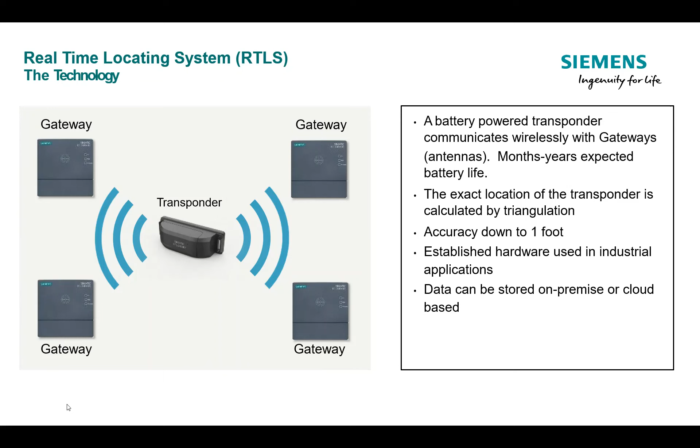The data that is gathered at the gateways is sent up to a head-end server, and these are the other components involved. So you have that infrastructure layer with gateways and transponders mounted on the assets, whether they're forklifts or crates or bins or any kind of vessel, and then pinging the gateways.

The XYZ coordinate TCP/IP information is provided to the locating manager. That's the head-end server. Locating Manager is the base level of software we can provide in that head-end server. We also have a higher software option called Location Intelligence. We'll differentiate between those in the next few slides, but that's where the smarts of the system are, and everything comes back to the Locating Manager.

The next step up is IT integration. What sort of systems do you have existing in your facility and use on a day-to-day basis that we'll have to interface with? That can sometimes take IT integration work, either via your own IT folks or solution partners that Siemens can recommend. But all that information is then sent up to your higher level system and translated into the information you might need for daily reports, etc.

The gateways are PoE devices, so typically powered by PoE. If you cannot power one by PoE, we can use an AC adapter, and the gateway in that sense, not connected directly to Ethernet, can speak to the other gateways wirelessly in a mesh topology. So you can have a mix and match of some that are PoE powered, some that are wirelessly connected to the other gateways. The fastest, best in terms of latency, since we're talking about RF here, would be to have them PoE connected for the lowest latency between gateway communication.

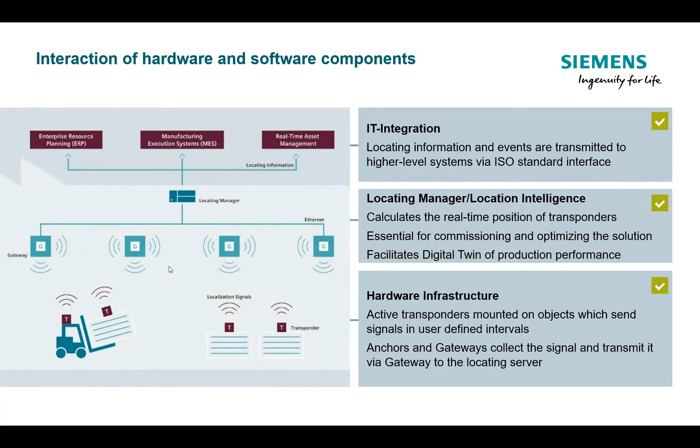Number one is the resolution needed. You might need 1 foot, you might need 3 feet, you might need 10 feet. The lesser the resolution, the fewer gateways, obviously. It also depends on the technology used. The FCC does govern which frequency bands to use, both indoors and outdoors. I'll say they restrict which frequency bands you can use.

In an indoor scenario, you use a combination of frequencies in the 3.5 gigahertz band, 2.4 gigahertz, and 6 gigahertz to do that triangulation and get the higher resolution. Outdoors, the FCC says you can only use 2.4 gigahertz, and using 2.4 gigahertz only, you're not able to achieve that 1 foot resolution — the best you can do is about 3 feet or so. The gateways themselves have all the frequency options in them; there's not a different one to use outdoors versus indoors. It's simply a matter of configuring for ultra-wideband use for indoor application, versus outdoor use at 2.4 gigahertz.

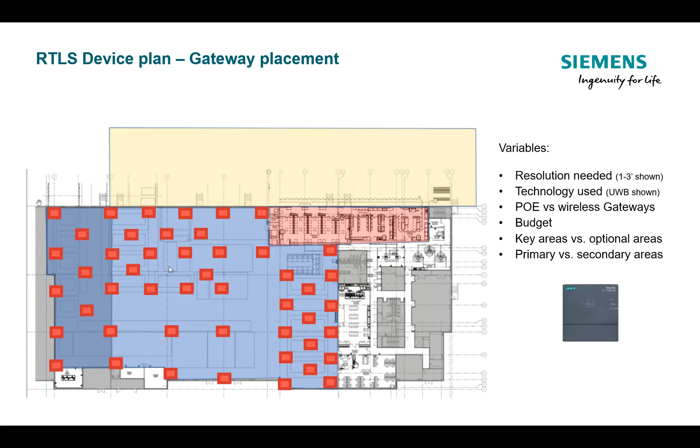Again, this was a fairly dense deployment because we're tracking to a higher resolution, and we also have issues at this facility from time to time as these equipment shelters are being constructed. There are times when this whole factory floor can have a dozen or so of these buildings, and what are they made out of? Metal and so forth, and have a high degree of reflectivity for RF, as well as potentially blocking line of sight.

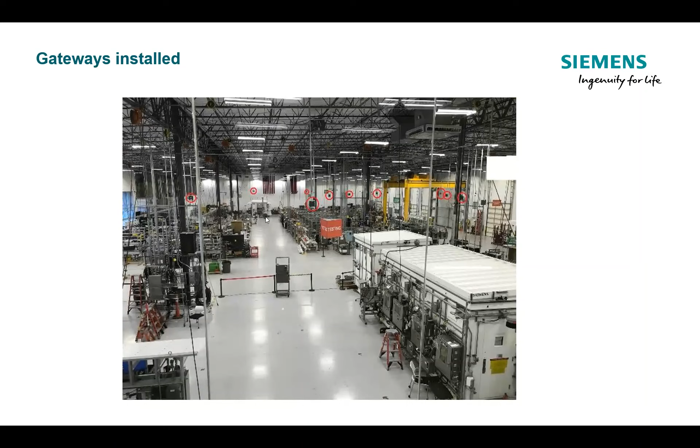Ideally, when we locate these gateways, we are planning for doing what we need to do to get clear line of sight. So again, there's a lot of them in this building because there's oftentimes a lot of these equipment shelters providing obstructions and so forth. But that's what it looks like. These are all PoE powered, so Cat5 run to all of them. And that's the idea of how it looks when it's deployed.

The LCD screen versions, where you can change information on the screen and give you current status in a visual context, are rechargeable batteries. So they have a docking port that you put them in occasionally to power them back to full power. Then there's a version of the transponder that's used for mobile applications with forklifts, AGVs, the buses I mentioned, the trains I mentioned. That transponder is powered by the vehicle power.

For the battery-powered transponders, battery life is dependent on how often that ping interval's been set up. But generally speaking, you can expect a worst case 6 months and best case a couple year type of lifespan out of a battery before it needs to be charged. But again, if it's in, let's take the example of the Siemens facility with social distancing, we're pinging quite often. So they use the smaller 3-inch LCD screen transponder, and those need to be charged probably every couple of weeks or so because of that application.

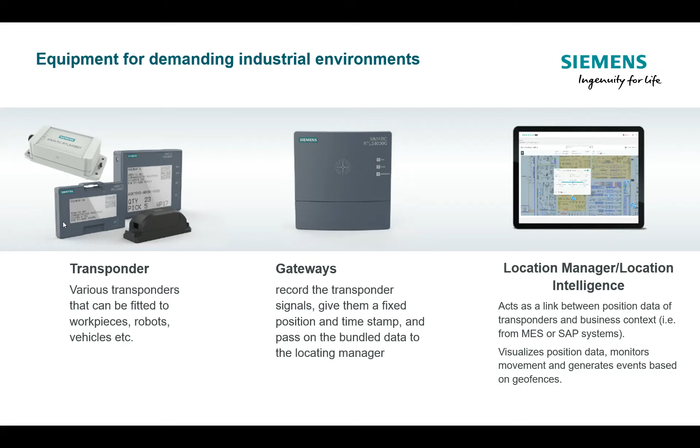I mentioned the software options. Let's go into that in a little more detail. So the base level of software used at that head-end server is called Location Manager. It gives you visualization over the site plan that can be imported from your facility and shows you where a transponder is located and how it's moving through the facility. Pretty basic level stuff, but it's necessary for any higher level software that you're going to be using as well.

The next level up from Siemens is called Location Intelligence, and this provides the interface to the MES system. It gives you more analytical capability of the data, processes events, gives you a nice dashboard look, and allows you to, in a user-friendly format, configure your tags and assign orders, or we call them orders. It's assigning the duties of the tag, naming the tag, and setting up the parameters of the tag.

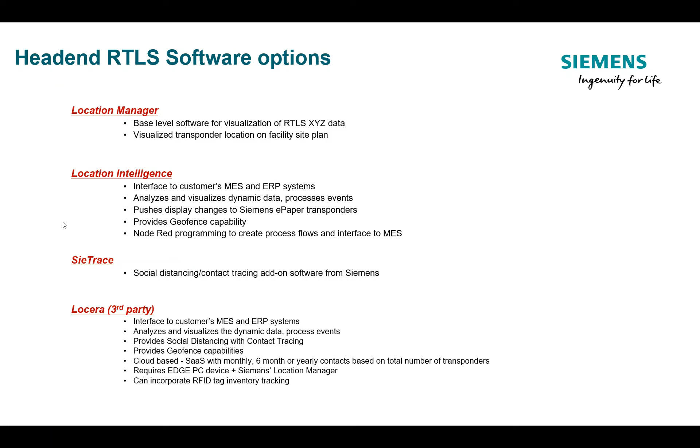Another way to look at these visualization approaches is when you categorize them into Location Intelligence, Locera, and then some fancy customer-specific one that a solution partner would do. So again, just bullets that we talked about for the 3 versions. Each does certain things best, and it's nice to have options.

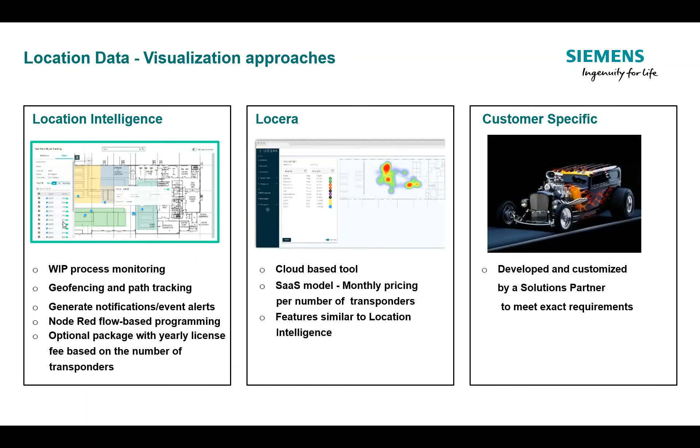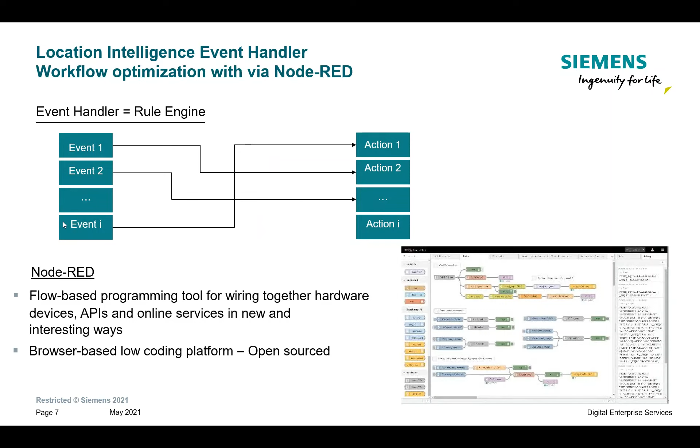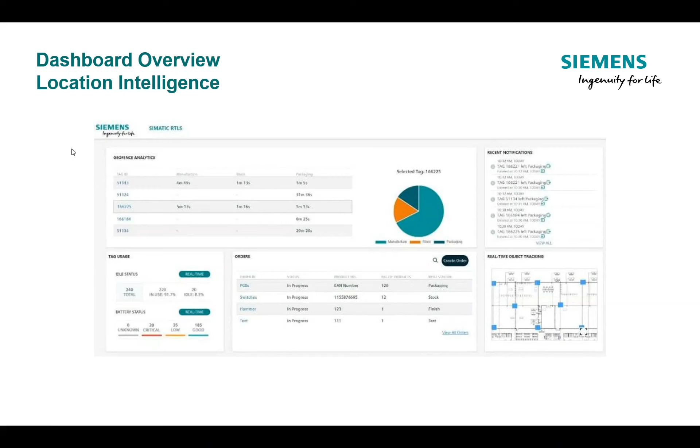So a good dashboard look. Some other screens that you can click through when you're selecting and creating these orders and assigning a transponder to a particular order, naming it whatever you want to name, looking at the tag IDs, the battery status, which tags are free, which tags are assigned. So you get a constant status on what's happening in your facility and how many tags are where and in operation, etc.

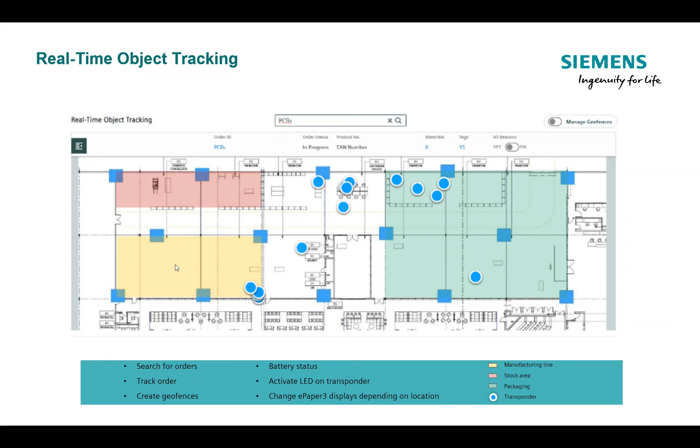Key to RTLS is solving the problem of locating items, but keep in mind it can be used as a solution for many things over the same infrastructure. So if you were tracking people, whether for safety or social distancing, at the same time you could be tracking where your AGVs are, where your forklifts are, and all this information can be seen on the screen at the same time, or sorted by tag type, etc. It's important to find as many applications as you can leverage the investment in RTLS and the infrastructure with.

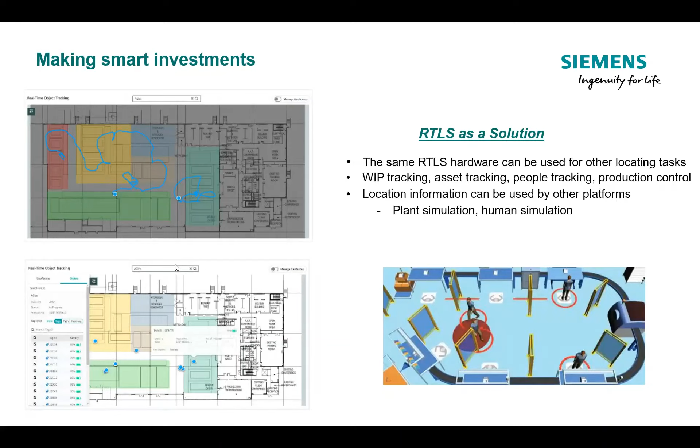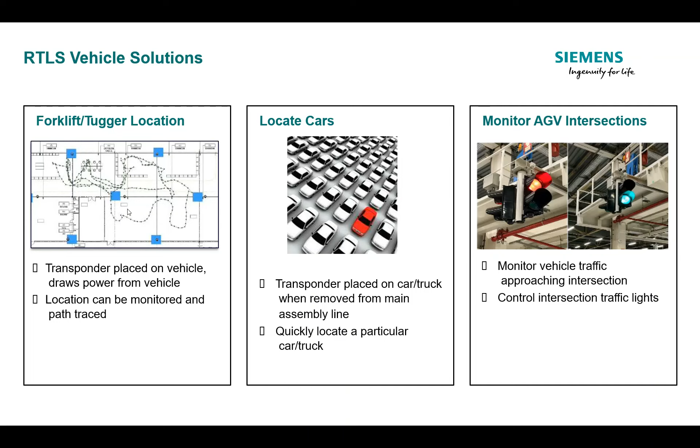RTLS can be used to monitor AGV intersections within manufacturing facilities. These green light and red light scenarios can be communicated with RTLS and help in providing efficient vehicle monitoring and traffic collision avoidance, etc. So good use for vehicles.

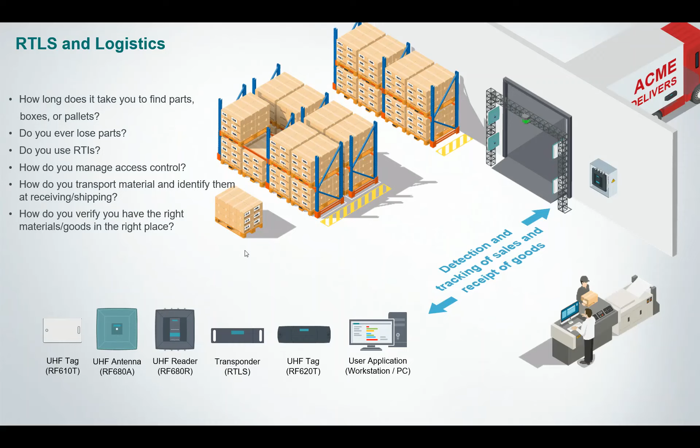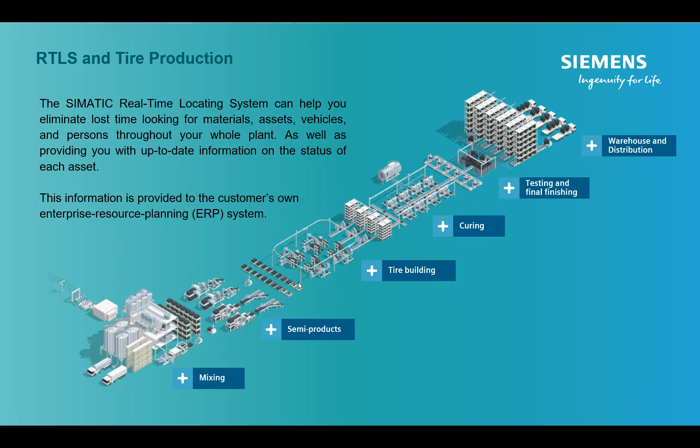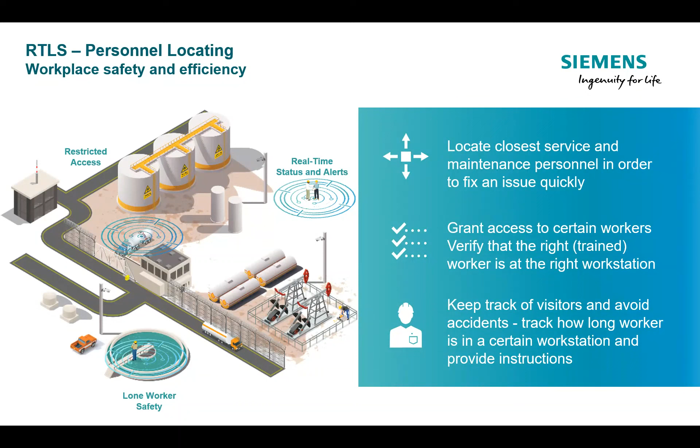Personnel locating for safety—this one is very popular. You might have, in an oil and gas type application, hazardous areas with geofenced zones set up. We have a partner called GuardHat that puts our transponders in their helmets, and the worker, as they walk around the yard, constantly knows where they're at. If they're in a dangerous area, they can get a tone through the helmet telling them they've been there too long or they're drifting back into a dangerous area, please get out of the way. So it's very good for safety and used quite a bit for that.

Another good application where we've got customers using RTLS is in automotive. In the manufacturing process, we use RTLS to track tools, not only where the tools are, but what route the tools took as the worker moved around the vehicle, tightening various nuts in his day-to-day assignments. There might be different torque settings required for using the tool at a different spot on the car, and that can all be affected and changed using RTLS to communicate to the tool.

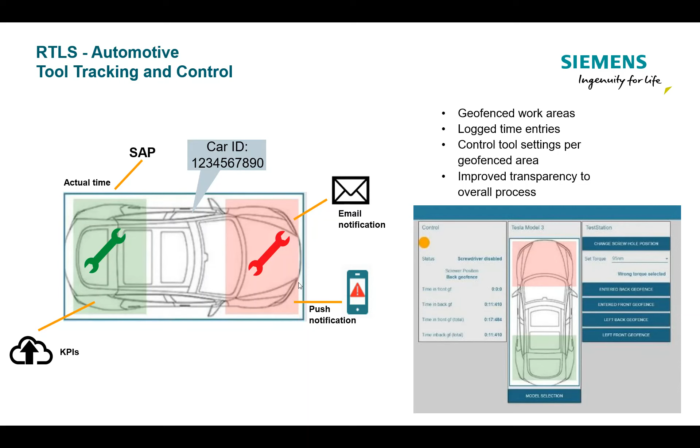As the worker moves, the torque can be adjusted to the proper setting for the proper location of the vehicle. Email and push notifications can be sent out so that monitoring of that process is done to see if the worker is doing things in the most efficient fashion and has taken the most efficient route around the vehicle, using the tracking capability we showed earlier. This improves transparency to your overall process and allows you to gather detailed data and make any necessary changes.

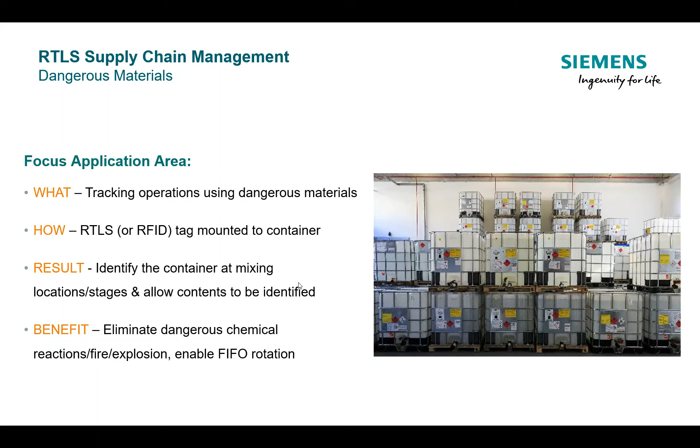Dangerous material handling and supply chain management: you're tracking operations and the dangerous materials used in those operations, attaching an RTLS tag or even an RFID tag to containers. This eliminates problems in knowing where the chemicals are at any point in time, keeping a record of first-in-first-out rotation if that's important, and knowing specifically which chemicals are next to other chemicals and where they're located in storage, eliminating things like reactions and explosions because the wrong chemicals are next to each other. Another great application for RTLS.

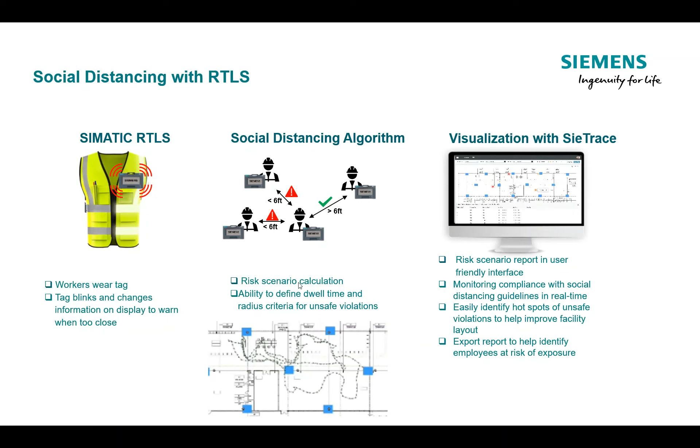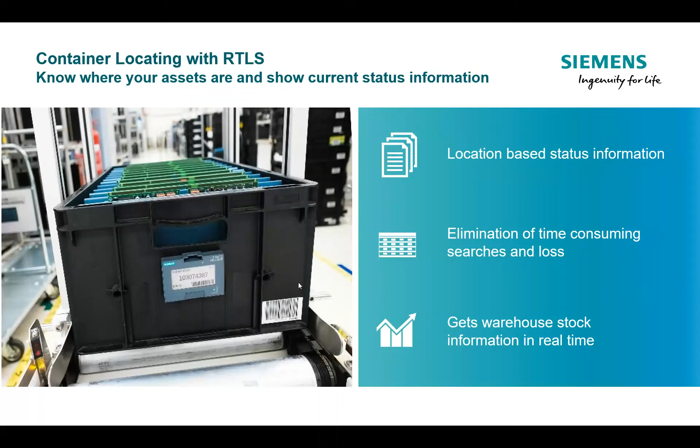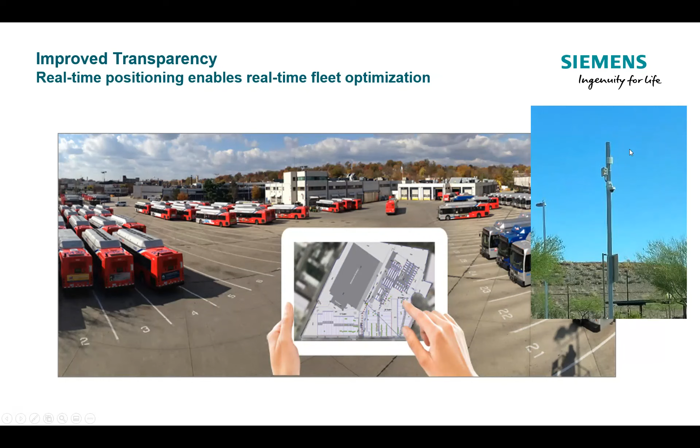And you might put it in with one application in mind, but remember, you can do multiple applications over the same infrastructure.

And that is about it in a nutshell, everyone. Thank you for your time. As I said, we'll make this available so you have these links to do a little bit more research, but certainly feel free to contact me at any time.